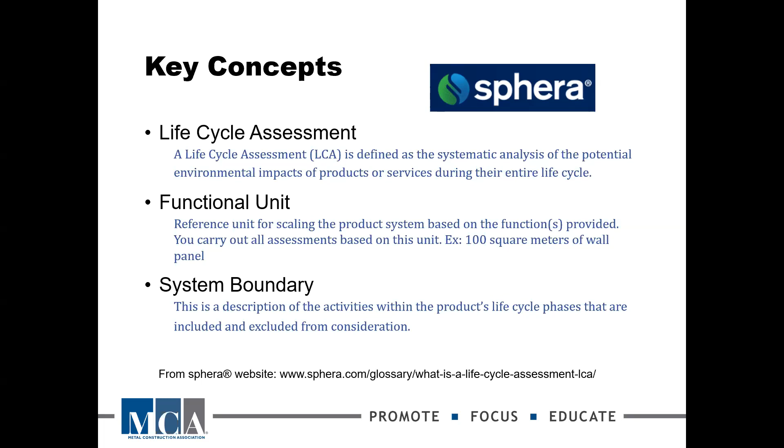And you also have to understand the idea of a system boundary, which is just a description of activities within a product's life cycle phases that are included and excluded from consideration. That's really best shown by graphics. And I've got one coming up in a second to show you what that is.

Well, as you do LCAs and you're picturing these flows going in and across the boundaries, you'll talk about reference flows a lot, which is the amount of a resource needed to provide a functional unit, expressed in whatever unit is appropriate for that reference flow: mass, energy, volume, something to that respect.

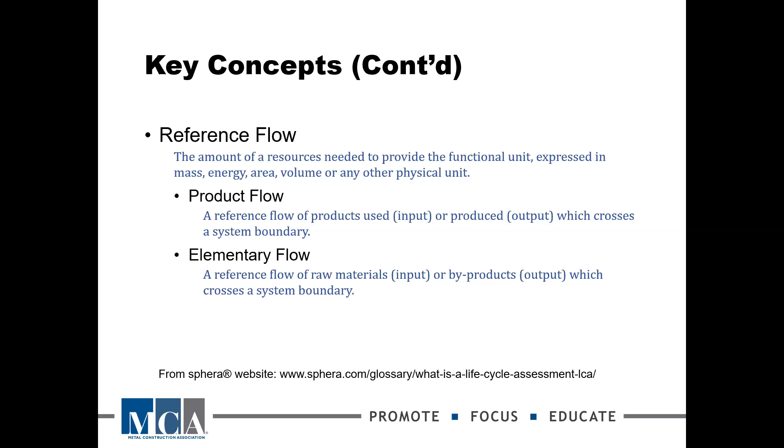And then those flows kind of break down into two things: a product flow. So this is the flow of input products and output products that go through this process, and they kind of drag through these processes that you're analyzing, and they pull with them elementary flows, which are reference flows of raw materials on the input side, or byproducts on the output side that cross the system boundary. This is all dry stuff.

But here's a really good graphic that I think kind of shows that better. This is actually from the ISO standard that dictates LCA principles and frameworks, 14040. And it shows that I draw a system boundary around my process, production of a product in our case, the process I'm trying to isolate. And outside of that boundary is called the system environment. Inside is the system itself.

And we can bring in inputs, the examples here are other systems, which is a product flow, or elementary flows, which might be resources that are used. Water might be a good example of that. They go through that boundary, and then whatever you're analyzing according to the scope of the LCA happens. You break these down as subsystems. You look at the materials and flows between those subsystems.

You as the consumer probably don't need to worry so much about that. We as manufacturers and our LCA consultants certainly do. But as a consumer of an EPD or an LCA, it's good information to have and understand, but not necessarily critical to your application of these things. You're looking at what comes out of the back end, the elementary flows, which are the discharges to the system environment, and of course the product flow, the thing you're after, right? This is what you're trying to apply.

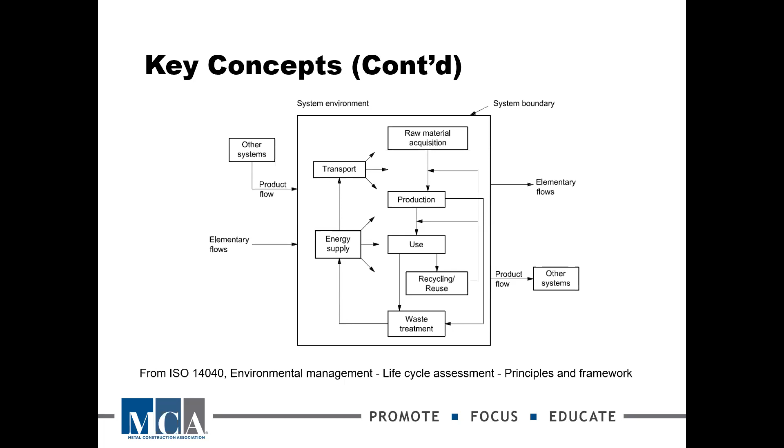And so that brings up more definitions, a formal definition of life cycle assessment and life cycle inventory. I'm going to focus in on inventory first because it's the phase of the life cycle assessment involving the compilation and quantification of inputs and outputs for a product through its life cycle. Essentially, what that means is I've got a big giant database of these materials going through these flows, and the process of it going through that flow generates an impact. And so I'm building a database of those things, and I'm accessing that database as part of my LCA.

And what you'll find is these databases come from lots of different sources. They are also driven by ISO standards, and they are compatible, but not always in sync. And it's something else you've got to be very well aware of, that you're not getting out of sync between your database and your processes.

And then you go through a couple of really important phases of an LCA, and it's a life cycle impact assessment. That's the phase of the life cycle assessment that's aimed at understanding and evaluating the magnitude and significance of the potential environmental impacts for a product system throughout the life cycle of its product. That basically means that this is where the rubber meets the road. You're trying to define what the impacts to the environment, the world, are from the result of these processes and these flows. It produces the metrics that say this is what we're going to judge this product, this system by.

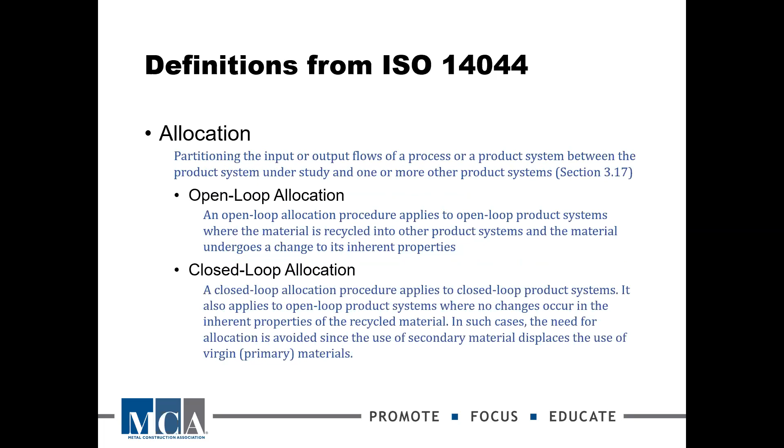We might come back to that if we get some questions, but allocating these flows is really kind of like allocating financial flows, and relates to how recycled products are handled. Here's the observation that I hope you're coming away with. Number one, the LCA is a very versatile tool, very scientific, very systematic. And it can be applied in lots of different ways with different results because the goals and the scopes are different. And that works really great with a whole building approach.

When I'm sitting down, I'm trying to come up with the best, most sustainable answer in a building. I know what that building is there for. I know how it's going to be used. I know its expected life cycle. I have all that information. And so that's what makes this really work well with a whole building approach.

But now as manufacturers and consumers of this data, we're all working with different buildings. We all have different things that we're trying to accomplish. So how can I take these results and apply them across different projects in a systematic way? It's a really difficult question. It's what EPDs and PCRs really try to drive to.

And they do that at a high level through standardizing the scopes, the impact categories, et cetera, and using consistent data and modeling practices. So the modeling practices are consistent with the data, but also consistent with the standardized scopes and impact categories. And that is really important, obviously, if you want to be able to compare results between alternatives. But there's other things you need to be cognizant of.

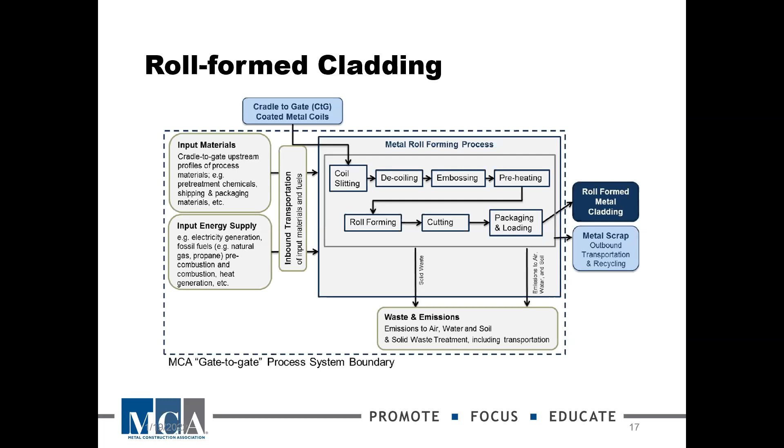And then, of course, the input energy supply, which is just the power that we're using as we manufacture these things. Now, most of those impacts related to manufacturing are driven by the input energy supply, which of course makes us regionally dependent, depending on grid efficiencies. And so this is where things can get quite varied. But what I'm going to show you is the impacts are really being driven by these coated metal coils, or most of the impact. In fact, you can see that on this next slide.

What does that mean? That means that the inbound transport and the manufacturing process, in this case, really aren't contributing much to the impacts. And that's important because we take heat a lot of times from the market: you're producing an industry average EPD or LCA, and that's not as useful as product specific. Well, we're all pulling from the same coil set. So having a product specific EPD isn't going to really help you much in terms of accuracy, right? You really got to focus in on what your impacts are of the coil coming in.

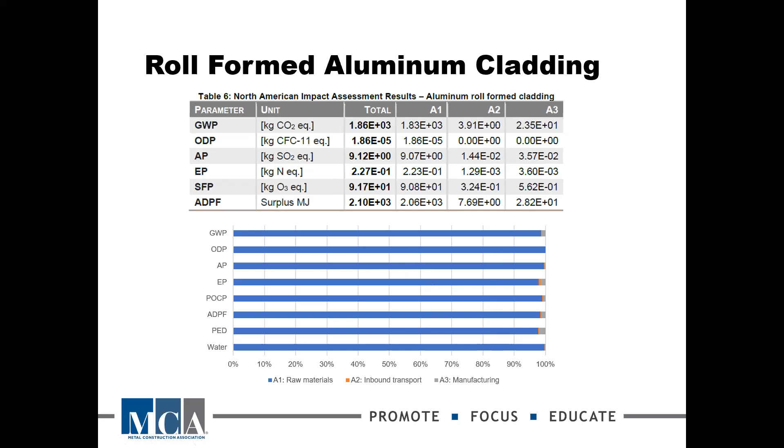And insulated metal panels, as I mentioned earlier, have foam plastic, and those foam plastics have blowing agents, and we're working as an industry very hard to migrate to blowing agents that produce less global warming potential. So you will definitely be seeing this driven down. This is part of the reason why EPDs have this life of 5 years, knowing these kinds of things happen. But again, most of the impacts outside of global warming potential are all due to the inbound raw materials.

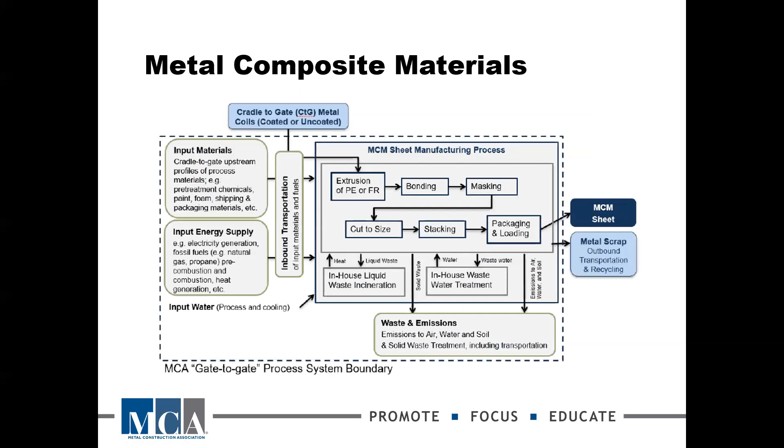And metal composite materials, much the same thing as the cladding, as you see, with the exception of a couple of things, eutrophication and the POCP are driven a little bit more by manufacturing, but still well over 80% of those impacts are experienced prior to the consumption of that material.

All right, a lot of stuff there. Let's just pull back and talk about this from a higher level. Most impacts are experienced upstream, as I brought up, and that really shows that industry average EPDs are appropriate, and you're not going to get a lot of accuracy increase by having a product specific EPD, at least for these types of products.

It's also important to understand the relationship between mass and area for cladding systems, not so much between those cladding systems, but back to that example I gave earlier from comparing metal cladding to other materials. Are they using the same functional units? Because my aluminum generally is going to be thicker than steel for the same product, or not same product, same profile, and that's not necessarily the case for other things I might be comparing against.

And what you'll find is that it's almost like you have to design the building twice, once for option A and once for option B, and then compare those results. And that's a lot of work, obviously. And that's what a lot of these tools out there aim to do. But these tools get a little black box-ish.

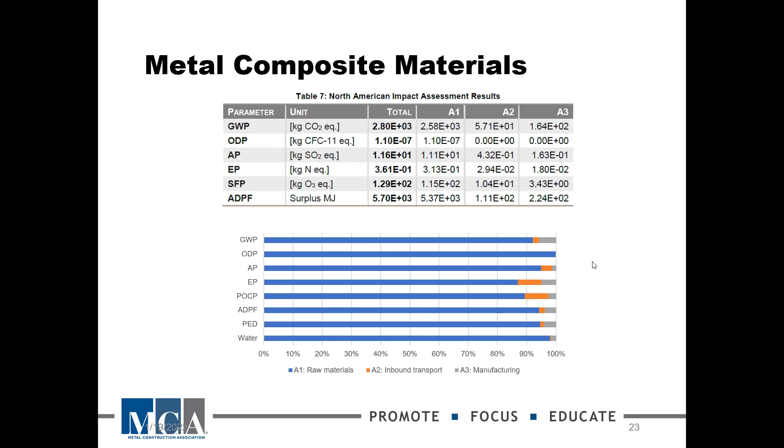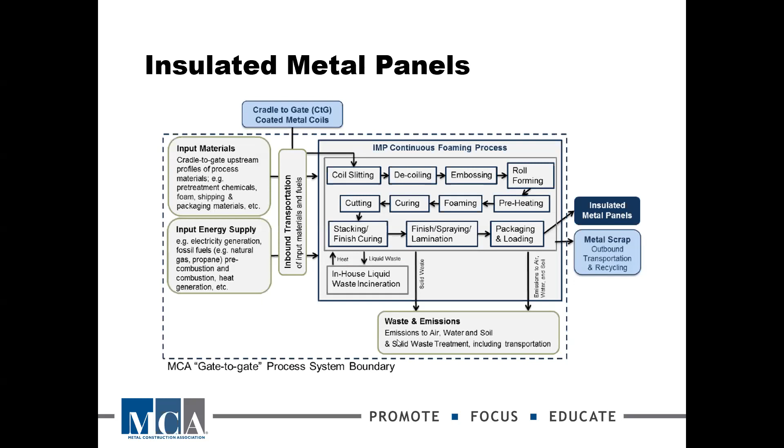That's a great question. So the answer is really hard because you have to do it in a proper context. Let me go back to the scope. That's probably the best place to show this. So you've got to remember this GWP is part of a cradle to gate, meaning it goes up through A3. So I've experienced a certain carbon impact up to this point.

Now, depending on the product that we're talking about, it might transport to the site more efficiently or less efficiently. It might install on the building more or less efficiently. So you can't really draw that line without looking at this all the way through the use stage and the end of life. So there is no general guidance for this. It's really going to depend on the life of the building, the maintenance, repair, replacement, refurbishment cycles, and operational energy use.

Insulation is not what this discussion is about, but it's probably the most obvious example. I'm going to experience some carbon release because I'm using insulation. It takes energy and resources to make it, and it's going to produce carbon. But if I put it on a building and it makes it more energy efficient, I'm going to gain that back.

So it's not just the carbon. It's how efficient does that insulation apply to my particular building and my particular assembly. So you really have to go through this whole building LCA process to get that answer. And I know that's probably not what you want to hear, but that's the honest truth.

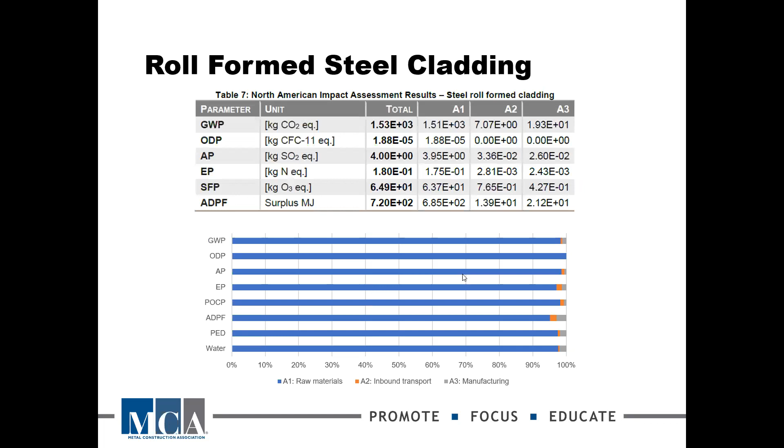And what I wanted to do here real quick was go forward here to my last slide. How are we doing on time? Let me check on that real quick.

Perfect. I think we covered ASHRAE 189. I want to talk to you also about some state actions, because this is where I think this is really going to become an important subject, even more important, in the area of code and standards development. We're already seeing two entities begin to look at this pretty closely.

California, through their Title 24 development process this last time around, they were really not as considering of straight up energy efficiency as they were decarbonization. The reason why those two aren't the same: if I can have a very efficient way to produce energy that produces carbon, that's not necessarily good in the code's eyes under this new process. Previously, it was not really looked at, at least at a very detailed level. Might have been high level assigned.

I mean, we know that burning natural gas at site probably produces a lot of carbon, but there's not been the in-depth analysis that an LCA can provide done prior to this. This is really very new. And California has taken this on over the last 3 years in developing the new version of Title 24. They were the only ones, actually, that's not true.